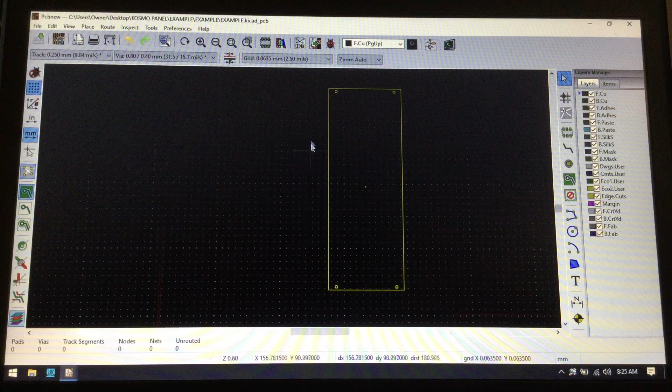That's where you basically dictate how thick the board is going to be, what the edge cuts are going to be. I leave certain holes on here so I can set points of origin, so I can lay things over the top of this.

So we're going to go to Bitmap to Component Converter, and what you do is, after you create your images in Inkscape, when you export them, you want to export them around 1000 dpi. When you export them at around 1000 dpi and make the background of the image white rather than clear, it allows you to bring it into Bitmap Converter and completely wipe out any sense of the background, leaving only the lines.

And so when you load an image into Bitmap Converter, it ends up as a black and white image, and that's what's going to be on your board.

Now, you can dictate whether or not it is going to be copper, silkscreen, or Soldermask. If it is going to be Soldermask, think of it like this: if you lay something onto the Soldermask layer, it is then going to become a negative layer. So if you put something on the Soldermask, that's where Soldermask will be removed rather than added.

So what you then do is, say if you want a copper layer below that, you put a copper layer and then the exact same Soldermask layer, and that will then allow you to expose that, and then you have them plated in HASL, or you can have them do it in the gold looking one.

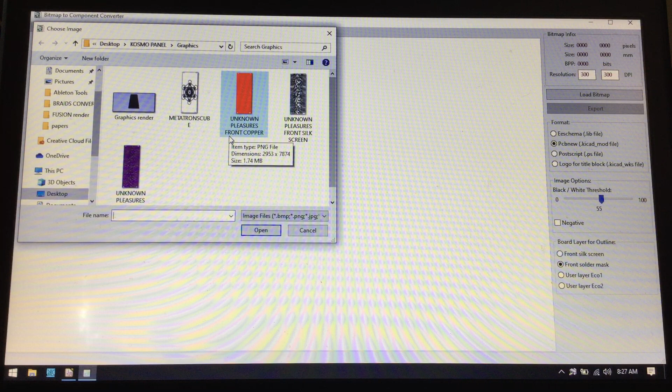So the problem with this is, when you are loading things into Bitmap Converter, it only gives you front silkscreen or front Soldermask, user layer eco 1, user layer eco 2, rather than giving you the ability to just dictate that you want it on the copper layer, or you want it on, say, the Soldermask layer.

So we're going to load in an image that I have for the copper layer. So when you set it to 1000 dpi, it's going to end up really, really big here. You do not want that image to be teeny tiny. You want it to be really big so you get all of the fine detail.

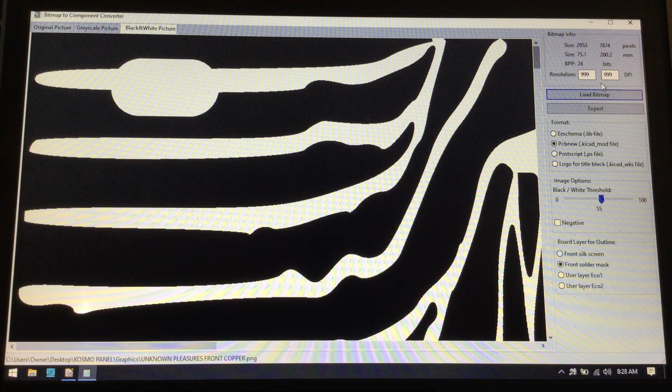So now we're going to export that. It does not matter what we click over here. I suggest keeping it at front silkscreen or front Soldermask.

And then what we're going to do is we're going to load this into a graphics file. So I'm just going to call it example copper layer.

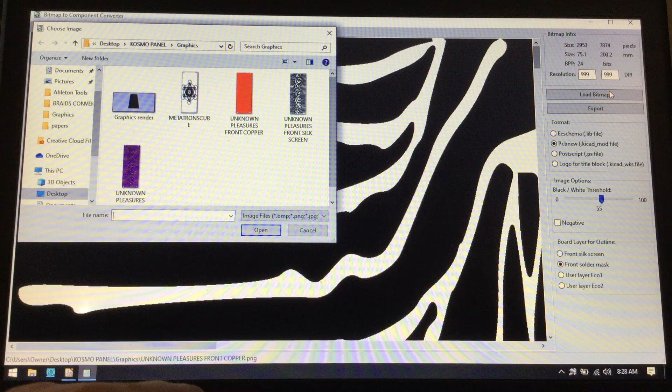Okay, now say if I have the exact same thing for the Soldermask, which I do, it's the exact same image, just Soldermask.

We're going to export that one as example, and what it does is it saves it into a KiCad .mod file, and that's very, very important to note. This is the Soldermask layer.

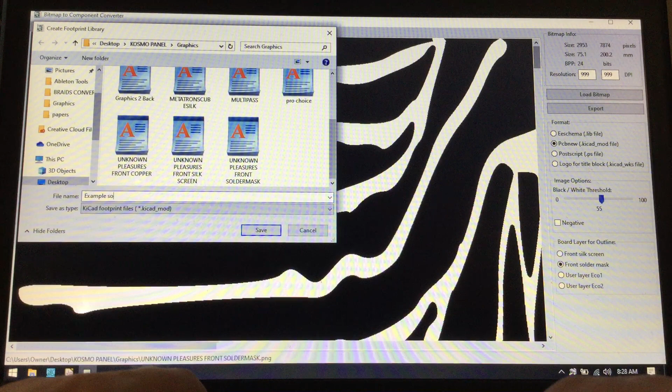So, and then we're going to want some silkscreen. So I'm going to just call this example silkscreen. That one you do want to set to front silkscreen. That is kind of important on that one.

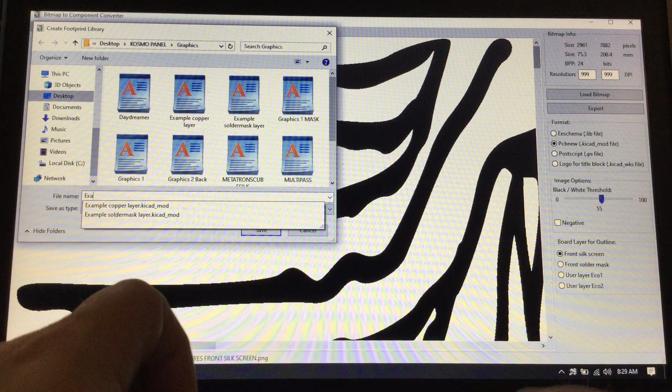Okay, so now we get out of the bitmap editor, and one very important thing is to go where you have those files. Okay, so they're going to save as a .mod file, and what you want to do with that .mod file is you want to open them in a normal standard text editor.

So when it is in that text editor, you can go into it, like say here is the copper layer. We're going to open that up. Now we want this to be on the front copper layer.

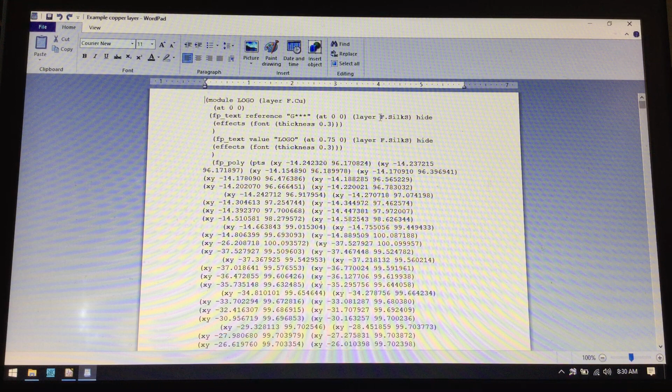So this right here, if you look, it says layer F.Silks. Now we want to grab that, and we're going to go to replace, and you are going to then change that to F.Cu and hit replace all. Click OK, exit out of that, and then save it.

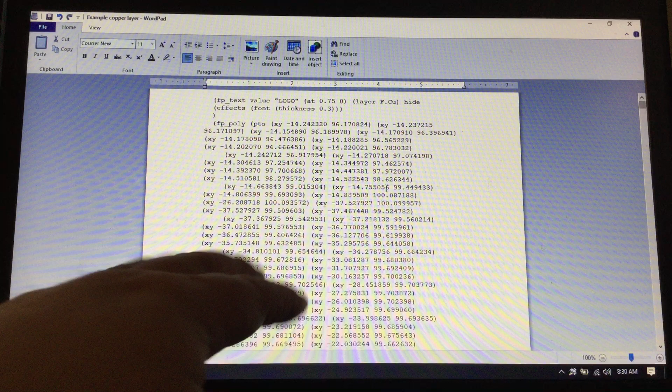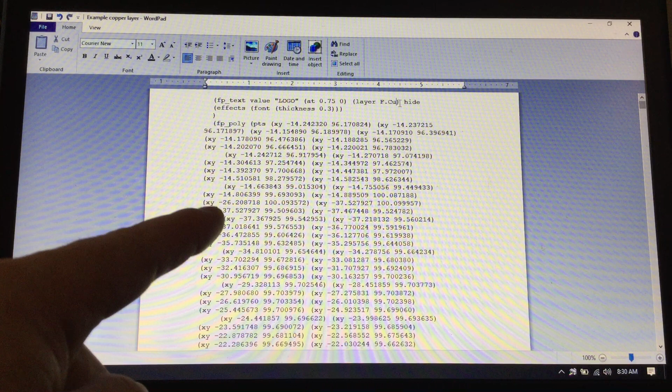And what that then did was that changed that file from being on a different layer, a silkscreen layer or a Soldermask layer, etc., to the front copper layer, and then it changed all instances of front silkscreen to front copper layer. This will then make that layer specifically go on the front copper.

I'm going to show you one more thing when I open the next one to do the Soldermask. This one, instead of saying front silkscreen, must say front or F.Mask or mask.

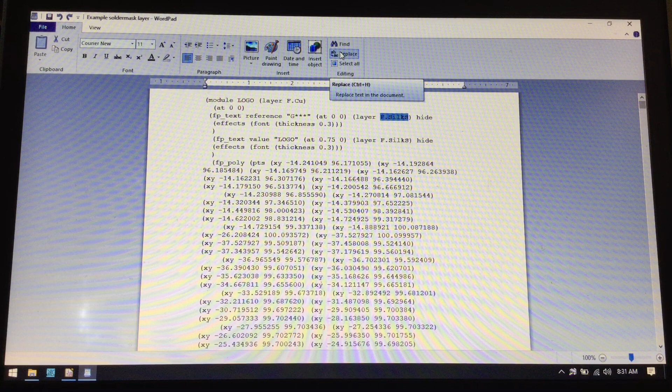Mask. It's funny. So we're going to change that to f.mask and replace all. Hit OK, hit X, and hit save.

Now something to note, if you are on the back side, if you look at the very top, this says layer f.cu. That means this is on the front side total. That has nothing to do with this one, but that's just saying this is on the front side.

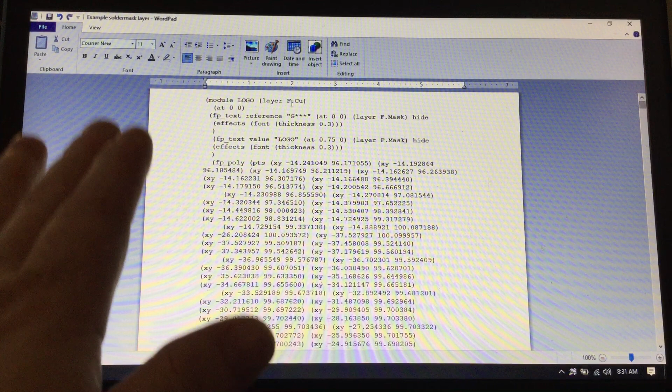Now, if you were to change this to a B, and it was to say back copper, and then you did back soldermask, everything would be on the other side, and that's how you start doing all the same stuff on the opposite side of the board as well.

So we save this, we exit out, and then we're going to open up just the example silkscreen as well. That's f.cu, f.silkscreen, so that one's perfect, and we don't have to change anything.

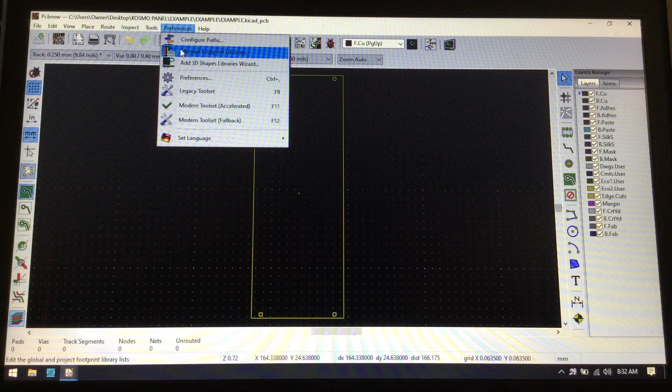So now we go back into the PCB, and you want to give your program the ability to know where those new footprints were.

So we're going to go up to Preferences, Manage Footprint Libraries, go to Project Specific Libraries, open that folder, and we're going to go to Graphics because that's where we saved all of that in. Hit OK, and that's going to make this a project specific library.

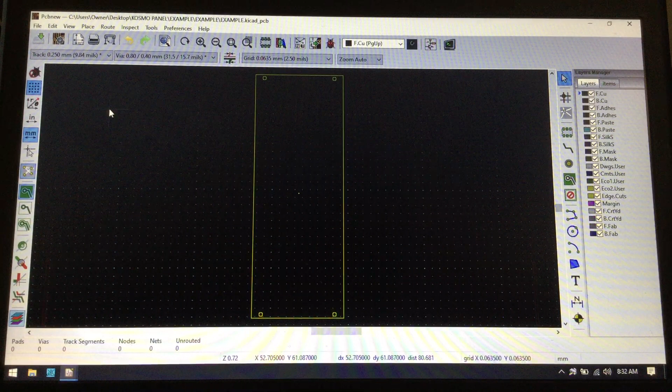Hit OK, and now when you lay down a footprint, you can lay down the footprint specifically for the back copper, front copper, front soldermask, and then you can utilize the silkscreen as a soldermask, or a component as well.

So let's just give this a moment. I completely forgot about the fact that it takes about 2.5 minutes on my computer to load the libraries because I have a missing library. So I'll just jabberjaw during this little 2 minutes here.

There's a couple different things you can do, but you have to take into consideration that A, rendering takes a really long time, and B, you can run into some issues if you have a slower computer. You can make multiple pictures or multiple traces of the same image and then leave certain parts in, take certain parts out, fill certain parts, adjust the stroke on certain parts, and then you can kind of do what I did to that Furby.

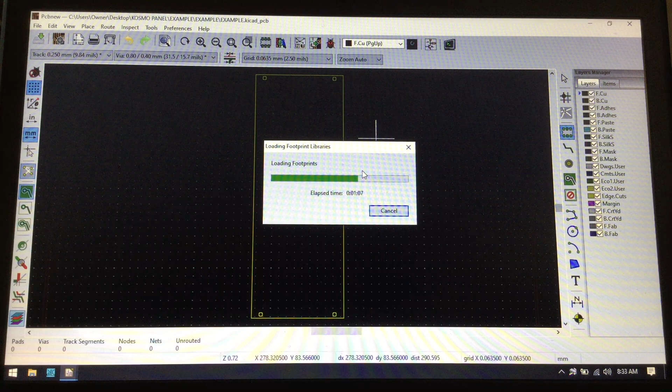That Furby was, if I remember right, 6 different layers to create the soldermask, the shiny stuff, the silkscreen, just to have that all in different spots. It took like 6 layers.

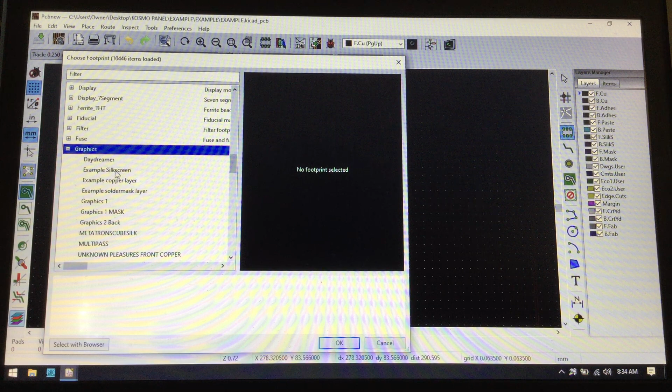Okay, so now since I gave footprint specific libraries the ability to go to graphics, that's where I have those examples saved. So we are going to grab the example copper layer, and for some reason it turned red. I don't know why, but either way, now we have our copper layer.

Okay, so you would just place that on the board wherever you needed to place it. Like, obviously you're trying to get it to match up.

That's what origins are for, but this one's kind of hard to set an origin on, just because of the style I did with it. For some reason it's purple.

Usually it's red. So we're going to click on this and go to properties just to make sure it's on front copper. Okay, so it is. It's on f.cu. That's another way that you can change it if you're having any kind of issues. You can just make sure that it's on the front or the back side of the board.

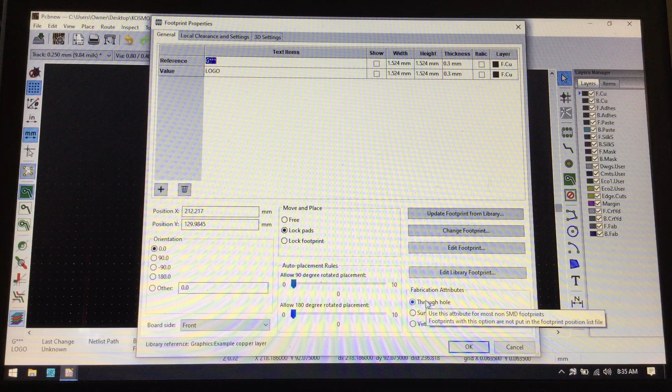It's going to be through hole on this one in specific. So yeah, so this is the front copper. We're going to add another component, and that will be the front solder mask.

So we're going to add the solder mask layer. We'll try to get this as even as possible. It might not be perfect, but that's fine, because these are basically the exact same file.

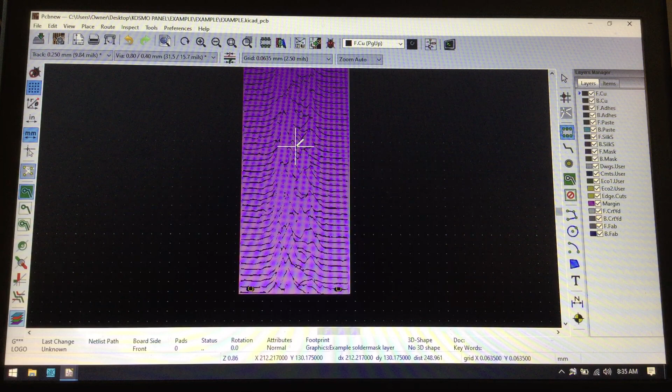Right, there's just about good. Got them even. Okay. Now we're going to add

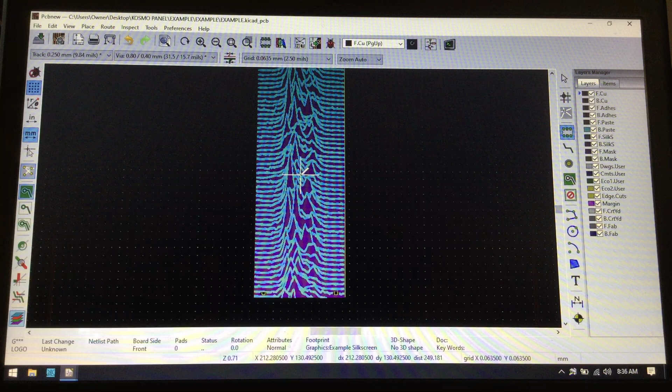the silkscreen real quick. This is going to be a pain because I got to line this up. So the silkscreen looks a little bit different. The silkscreen is what I did not want to show up as copper on this one.

Okay, so now let's go to 3D viewer. This might take a moment because this is quite a dense bit of copper cutting.

So that's sometimes why I have issues with these, because they'll make KiCad freeze if they're really intense files, or if they have a lot of cuts, a lot of weird copper cuts, a lot of weird fills, a lot of weird holes. Sometimes it'll take 15 minutes to render the picture, just so you can get an idea of what's there.

Other times it'll take like 15 minutes to generate the drill files, which is really an unfortunate thing, because sometimes you think your computer's crashing and then you just shut down the program and lose a whole lot of work, which is what I did.

Hopefully this loads here. It doesn't take a ridiculously long time. There's two ways you can set the render too. You can have like a full render right here if you click that. Otherwise it just builds a basic layer.

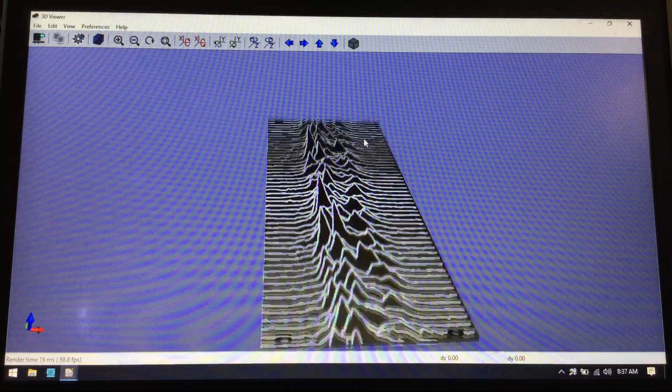There was a lot going on this one, so I'm hoping it pops up here in a moment. There we go. Okay, so now as you can see, what happened was the copper layers on the bottom, or this would all be copper layers on the bottom here.

It's all the shiny stuff. And then the silkscreen goes on top. And then the opposing side is just board.

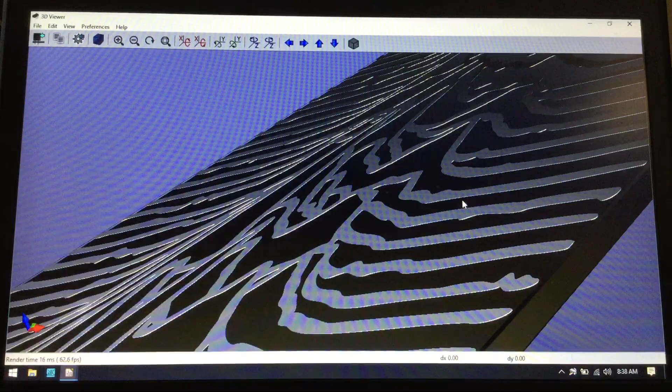So that's how you negate space and allow yourself to have exposed copper layer with silkscreen in between.